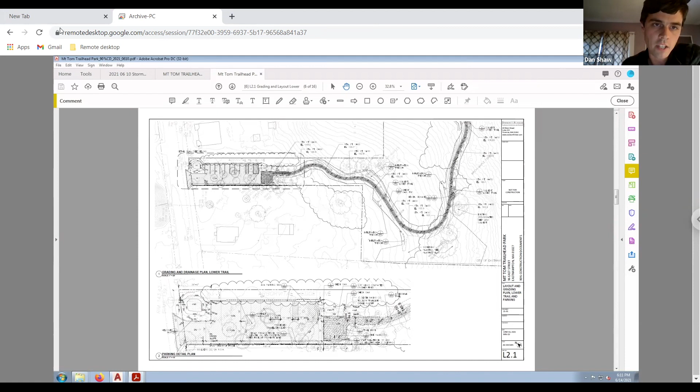Despite the spatial constraints of this part of the site, that's really the only reasonable place to locate any parking for this project. And in that area, we were able to fit a rain garden sized to handle the parking lot's water quality volume and recharge volume, with overflow handled by an existing 10-inch culvert that's currently on the site, right here, that ties into the city's separated storm sewer system on East Street.

We had a test pit dug last week to confirm the underlying soil suitability and found sand and no evidence of groundwater at full depth.

The rest of the project area uphill of the parking area is, again, a trail with low impact development drainage techniques—check dams, infiltration trenches, swales—that are designed to spread stormwater that crosses the trail out across the existing meadows and forests, to maintain existing drainage patterns currently on the site and not to convey new concentrations of flow downhill.

So that's a quick overview of the project. Unless Steve D'Ambrosio, our civil engineer, has anything to add, we could take any questions.

Hi, Steve D'Ambrosio, GZA. Dan, I think you did a great job with the description. I really have nothing more to add, other than that I'd be happy to answer any questions that the commission has on the design.

I just want to note that there are no jurisdictional areas for the Wetlands Protection Act on this property. The commission is reviewing it because it does not need to go before the planning board. So under the stormwater ordinance, it came to us—it seemed most applicable to come to us. So it's really just the stormwater permit being reviewed today.

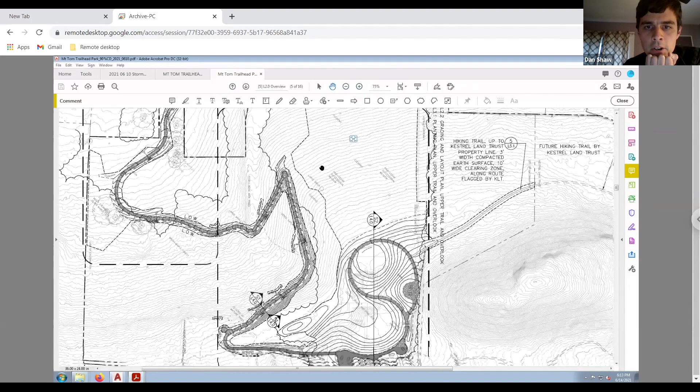Yeah, sure. So the site as a whole—currently the existing condition is meadow in this area, forest in this area, and another meadow down here. And the demolished house that's here, which is kind of a rough paved area—there's a driveway that extends up here, and an old crumbling asphalt place that used to be the parking area.

So we're removing all of that and regrading the top of the site into a meadow where the trail culminates. Then the rest of the site, what we're adding is the trail traversing the grade, and we're using swales on the uphill side of the trail throughout to keep the trail from washing out.

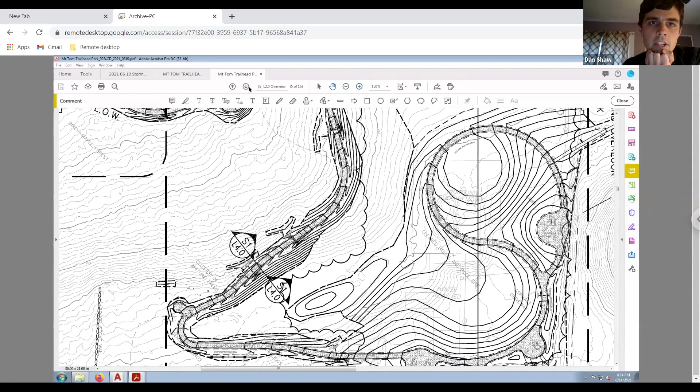And then, because those swales are intercepting stormwater flows, periodically along the way we have—let me go to a detailed plan that shows it better—we have check dams and culverts that cross underneath the trail. I'll show you a typical example of that for the upper trail.

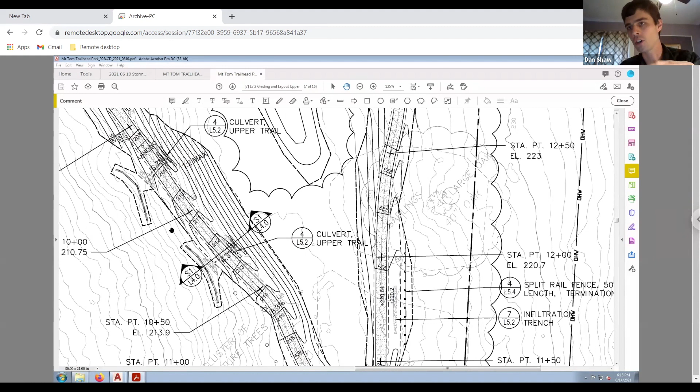Where the trail crosses through, we have a swale on the uphill side, and then a sump, a stone-lined, dry-laid stone sump with a PVC culvert crossing under the trail, exiting at a stone-lined outfall that will be shaped on contour to act as a level spreader. Downhill of those, in the steeper forested part of the site, we're installing biodegradable compost socks that'll be seeded upon completion of construction and remain as permanent berms to level spread the water further and drain it back out across the woods, which is what it currently does today.

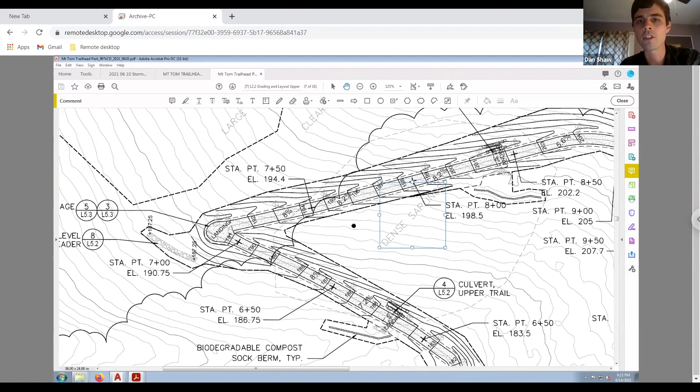That happens at several places throughout the trail. There's one place with a long stretch of trail where at the end of the swale, there's a stone level spreader, again just to distribute the water back out towards the places of the site where it currently drains. Then the lower portion of the trail system, which is a meadow, is on the page up here, I'm going to go to.

Conditions are a little different - it's flatter and it's an open grassy area. For the meadow portion of the trail, where the uphill swale by the trail crosses under, at the outfall of the culvert, we're installing geotextile-wrapped drain rock filled infiltration trenches that act on the same principle, spreading out water from those culverts and giving an opportunity to leak on contour out into the meadow. We have those features in 3 places along the trail here, just to counteract the trail and its swales' effect of intercepting water.

For stormwater in the lowest part of the trail that approaches the parking area, there's stone check dams using modified rock fill and 1.5-inch drain rock mixed together, just to rough up the surface of the swale, slow the water down, and give it a chance to infiltrate. Soils throughout the site are sandy, so we think this is going to work well. There's a couple low points we're placing along the trailhead just to give water one final chance to settle down, stay in place, and infiltrate before any of it crosses the parking lot into the rain garden.

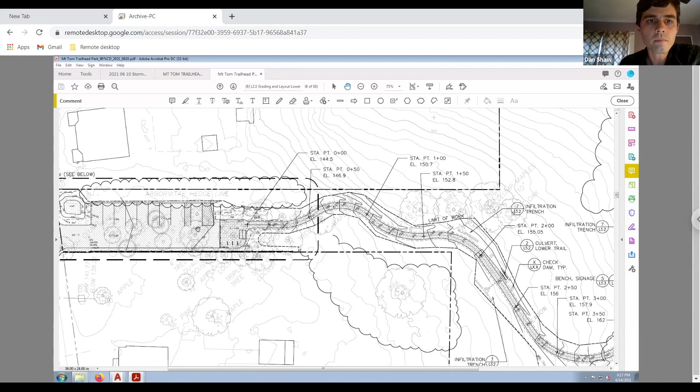I guess while we're talking about the upper trail, what kind of construction period erosion sediment control measures will be implemented?

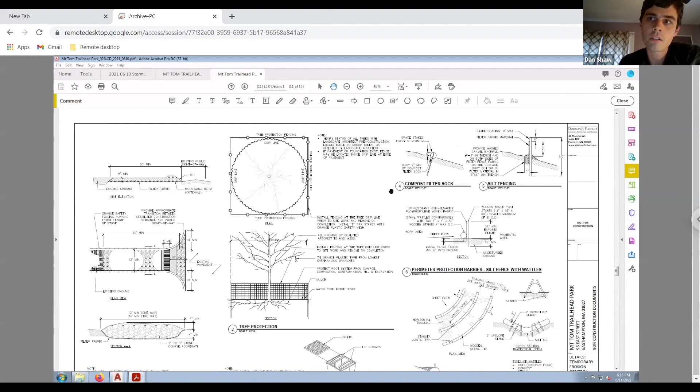During construction, here I can go to the details page. We're planning on perimeter sediment controls, using compost socks, straw wattles, silt fences along the perimeter. We're emphasizing in the SWPPP and in our specs use of biodegradable compost socks, specifically not using plastic mesh socks or wattles. And then, using typical details for the larger graded areas where there will be exposed soil, parameters for spacing of straw wattles on contour. It'll be up to the contractor to deploy these sediment control measures as needed, as weather conditions and project conditions require.

And then in those, it looks like some fairly large cut slopes in some areas. What will be done for stabilization of those, seeding, and that kind of thing?

All of the cut slopes, anything that we're affecting, is going to be seeded with various meadow and slope stabilization seed mixes. Our basis of design product is New England Wetland Plants seed mixes that we've used on a lot of other projects. In the open sunny areas, we're using the native wildflower seed mix, and in the woods, the cut slopes will use the semi-shade mix - a mix of native grasses and forbs designed to establish quickly to stabilize the slope. In the meantime, the sediment control measures I shared a moment ago will apply.

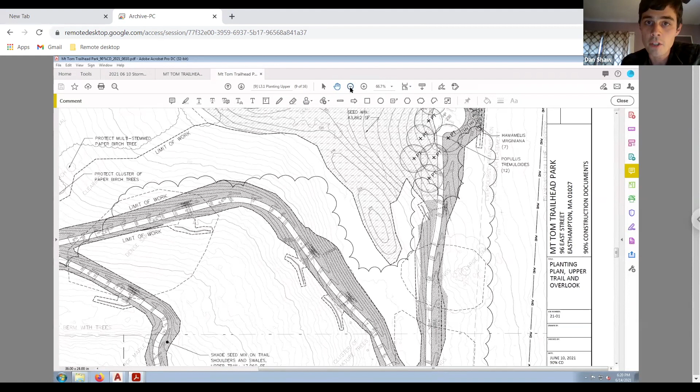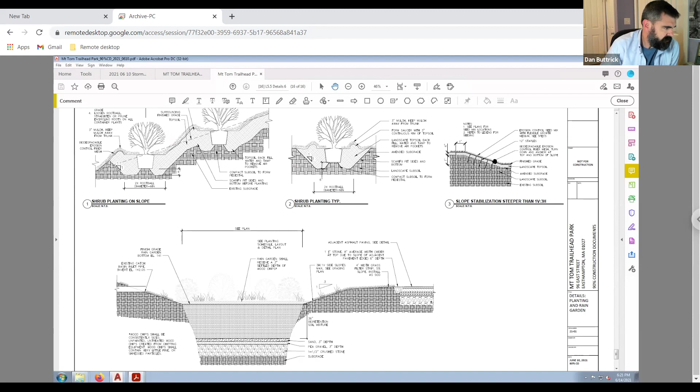And then in terms of stormwater calculations and whatever goes into that municipal separate storm sewer system, how do peak and current flows compare at that design point there?

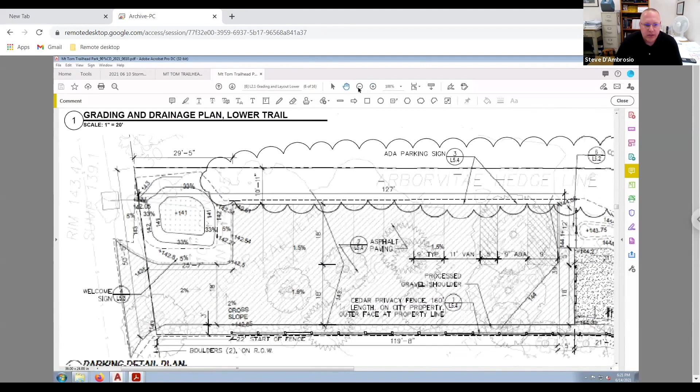I'll jump in at this point. We're able to meet the 2-year storm, so there's not a ton of flow heading to that corner of the property. In the 100-year storm, we're looking at 1.7 CFS in the existing condition and 2.6 in the proposed. In the 2-year storm, it's like 0.1 CFS, and we're able to match that. But as we get into the more intense but less frequent storms, there are small increases in the peak flow.

But it's not clear in the town's regulations what design storm we're required to design to.

We felt in this instance, designing the rain garden to treat the stormwater quality, which is a half inch over the parking lot, and also to provide the recharge. The soil on site, the surface hydrologic soil group that we used was group B, and we meet that volume as well. So we're able to recharge the water, treat for the water quality storm, and we meet up to the 2-year storm for peak flows.

For the benefit of everyone listening, the project, being not a Wetlands Protection Act jurisdictional project, and also not a larger disturbance type stormwater project, has a drastically reduced set of stormwater standards and requirements. It's really below what EPA required the city to meet on the ordinance we developed.

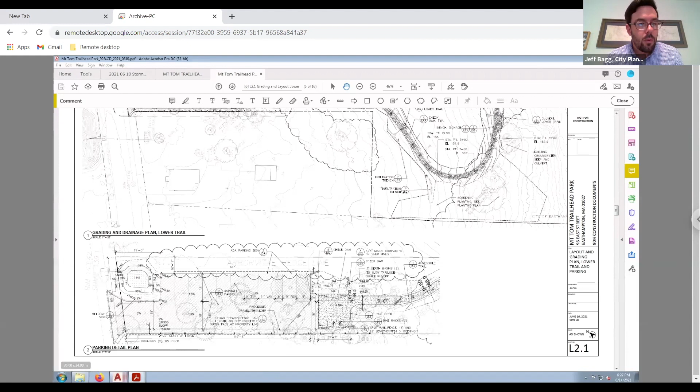So the PARC grant, if our contractor walks away, we will have some pretty significant issues just dealing with the park department, the PARC program. In a worst case scenario, we would utilize the CPA funds, which are matching, to bring the project to a point where it could at least be stalled until we can come up with another plan. I don't know if that answers your question, Dan. It's something where we do have the ability to hold 50% of the value of the project. And I think we'll know pretty early how our contractor is and the way it should function once we get in there and start the project. So we think that's suitable.

Okay, and actually I probably should have asked before, what kind of construction oversight will there be for the project? I'll ask for a little help from Dan on this, but generally the structure is, once the stormwater permit is issued, we're going to utilize Cassie's help as conservation agent, myself, and Diane Rossini, who's the staff engineer. We haven't ironed out all the details, but what we'd expect is myself to be the receiver of all information and change orders, and Diane would be available to inspect the site at least once a week and review any large change orders significant for the project. We've had this model for other projects and it seems to work reasonably well.

The dredging project at Nashawannuck Pond is a good example of us doing this for smaller projects. This isn't an extremely large construction project, so we feel like the 3 city staff members, with Dodson and Flinker available for other issues that may arise in terms of project design, is generally our plan of approach for construction oversight. And then the contractor, Dan, and this is where you should jump in, but with the SWPPP, the contractor will be managing and monitoring that. Is that correct? Yeah, yes, that's the contractor's responsibility.

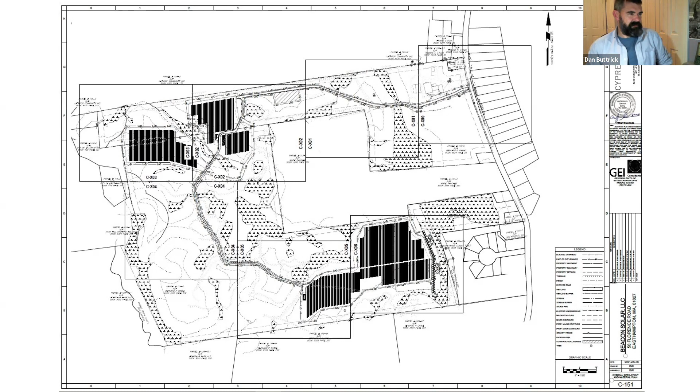So Dan, it sounds like you want to see the original one from 2019, not the amended one, since there's been three versions now. I'd just like to visually compare this to the most recent one we approved, the current approved plan. Okay, hold on a second.

While you're working on that, Cassie—is the installation or support method for these solar tracking panels different, and what does that installation look like? As I understand it, it's very similar, except these are single poles that the individual panels rotate on, rotating east to west back and forth. That's opposed to the racking system, which would not have been single pole—it would have been a series of poles with a fixed rack constructed on top.

So to be honest with you, I'm not sure whether there's fewer poles in the ground, which are really more like I-beams anyway, not poles like a telephone pole. There's probably fewer poles, but it's probably a bigger pole installation in the center, with a bigger foundation to it. Yeah, I don't believe there's really a foundation. I think they're driven in. Just driven in, okay.

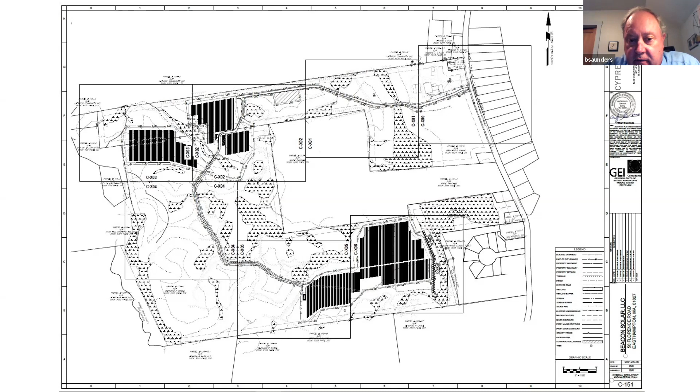It's Mike. Was there an elevation map showing elevation or slope? There is a topographic map. We have topographic information, it's just not at this size for the whole site. The topography is more limited in terms of contours.

Yeah, can you pull up the contour map? Yeah, hold on. I'm just wondering about the impact, if this is the highest point of the property, and the flow of water. Let's see if I can bring up something here. My screen sharing stopped.

I mean, that northwest array, is that the highest point? Is this showing? Not yet, no, for some reason I'm not. Here it is, there we go. That's the one I wanted. Bear with me, I'll bring it up. There it goes, we'll start now.

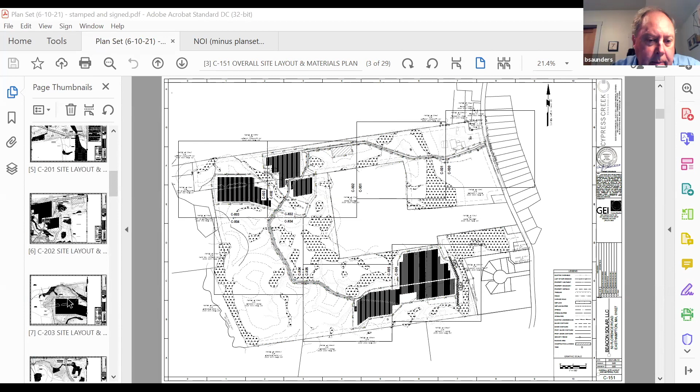All right, so where exactly is the question about the topography? That northwest corner? Okay, I'll get you right up there. Let me see if I can make it bigger for you. Is that too big? Yeah, no, that's good.

It's at least a 30-foot drop off, right, going down. From where? This is a valley in here. So it's down, so you're up at... no, I'm sorry, you're right. It's going from 185 to 180 to 170, 165. So yeah, that's up there. It's 25 feet from your 185 contour.

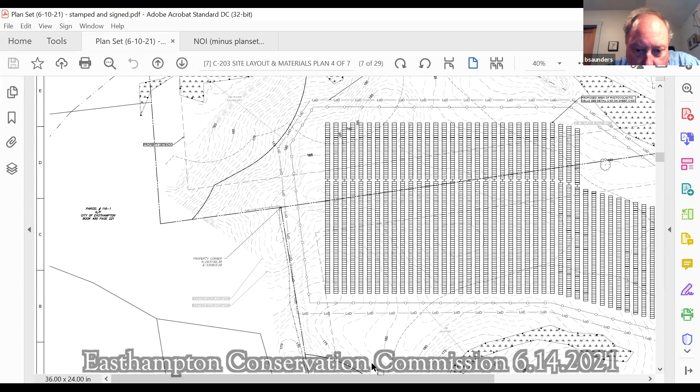Over here, let's see, 175 is up here. That goes down to 170 at this point. This is a ridge right through here. So that 185 contour is coming around like this. On this side, you're on the other side of that ridge.

So where specifically are you asking? Yeah, I was just wondering the impacts as it goes downstream to the wetlands. Right, so at the closest point up here, you're 25 feet above. It's more like closer to 28 feet to the edge of this wetland down here.

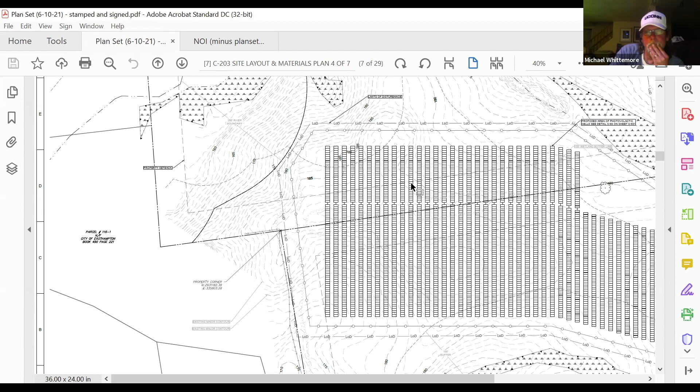Unfortunately, I don't know what the scale is at on this image, but it's 200 feet from — you see this line with the two dots? That's the brook, so this line is 200 feet away from that. Right. Do you have proposed erosion controls along the limit of work there? Yes, yeah.

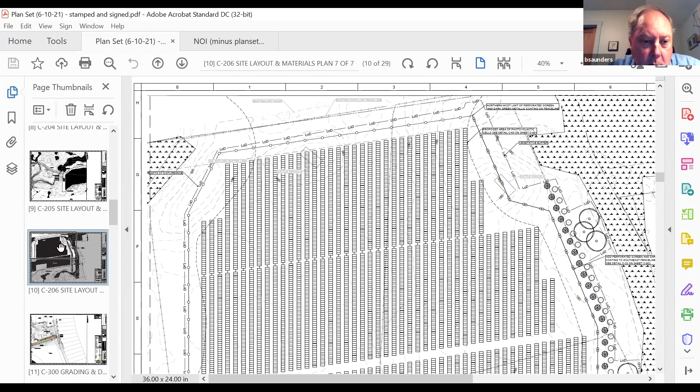If you want, I could show you the erosion control map. Cassie, were there basins or anything? Catch basins or anything? No, there are no catch basins proposed. Again, we don't have any real impervious surface. You see the SF line there? That's the silt fence. Okay, erosion control.

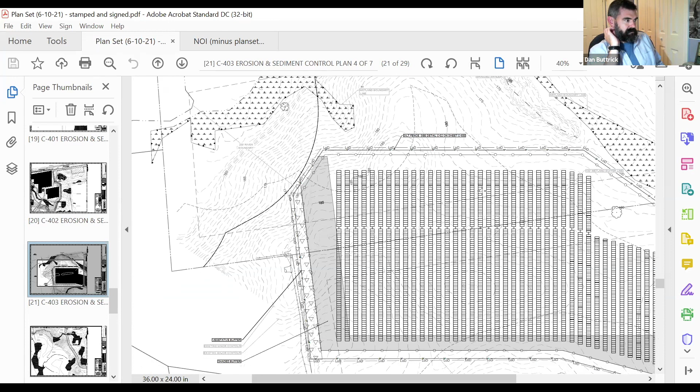Okay, thank you. So each solar panel just sort of drips directly on the ground right next to it, rather than having a big, contiguous runoff of impervious cover. So all the rainfall infiltrates right around where it would have fallen anyway. At least that's how I interpret that. Is that correct? Yes.

Do you plan during construction that there'll be more than 5 acres of exposed soil at any point simultaneously? There could be.

So the reason I asked is I was doing some research, and that was a concern for other potentially even larger projects, that if there's over 5 acres simultaneously disturbed, that could be a concern. If there was a major rain event, it could be a significant amount.

Yes, that all depends on the site and what the disturbance is. If you're on a very steep slope leading down to a wetland, you'd need to be particularly careful. On this particular site, the grading is a couple feet in depth, knocking that knoll down into the adjacent valley to flatten it or make it more consistent. We're not talking about wholesale grading of the site like you'd see in commercial development projects or subdivisions.

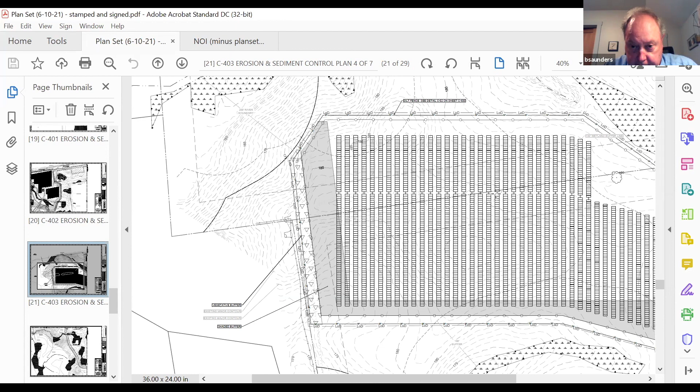It's really more of a spot grading situation. If you look at the grading plans, it just shows what I'm talking about, like knocking this down into there. We don't have large exposed areas anywhere that would concentrate flow going somewhere.

So you don't have any catch basins or anything like that during construction to help? No, we really didn't see a need to do that. That would just be doing more grading than necessary and exposing more.

And do you think, I don't know if this is something the commission would be interested in doing, but potentially a condition asking that there be less than 5 acres of simultaneously exposed soil? I don't know if that's reasonable or too burdensome for the project. It's just something I saw in my research noting that those huge areas of exposed soil can be a concern, but they're looking to construct this whole thing in a 3-month period.

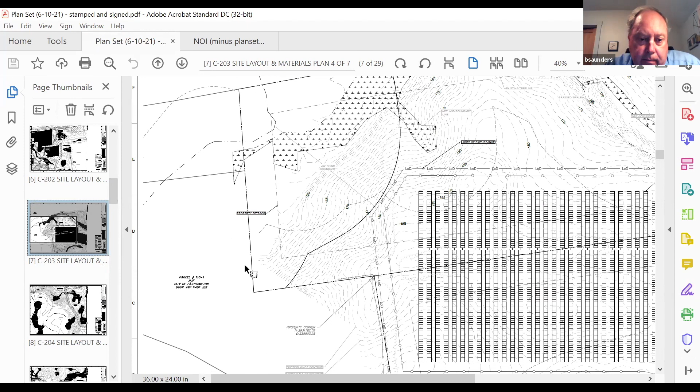Let's go back to this. So Bassett Brook is way over here. So you're showing what's on the property? Well, to the extent of showing what's on the property from a resource area standpoint. For instance, in this case, the 200-foot riverfront area is the resource area. We do have Bassett Brook identified where it's reasonably nearby, and we're outside 200 feet from it.

Well, yeah, we had to stay within the parameters of our site. In this case, Bassett Brook is right here, you see my arrow? And then it goes into this wetland.

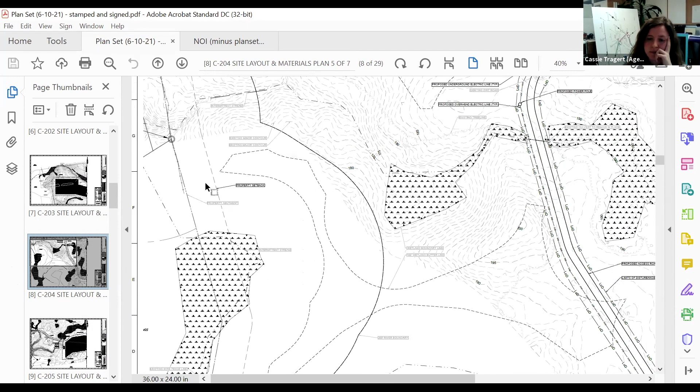I had another question. Would it be feasible for the plant, I guess my question is, what is the plant mix or seed mix you're proposing for the reseeding? And then would it be possible to do some kind of pollinator mix? I know UMass Extension has information on pollinator species potentially being put in that area.

Right, we had a mix that was specified in 2019, which we would go with. But if the commission would now like to have a pollinator mix, I believe that may have actually been in the order of conditions from 2019. If it's not, we wouldn't have an objection to putting it in this one.

I have a question about the drip line on the solar panels. I know these ones will track, as you said, so it doesn't necessarily concentrate the drip line in one spot throughout the day, which disperses that a little bit. Have you done a project like this before and seen any kind of impact in terms of erosion at the base of where that drip line is when you have this many solar panels?

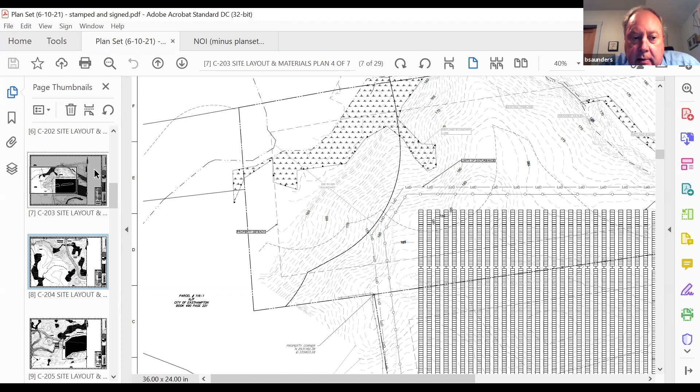Yeah, I can't speak to that specifically myself, but I do know from DEP's guidance 17-1 that they have found it doesn't cause a problem if the panels are designed in accordance with the standards in there. And these panels have been designed to those standards.

That'll also be part of the maintenance they do in terms of mowing. They'll also be maintaining the ground cover. Would checking for substantial erosion be part of that? Exactly. That would not be good for them either.

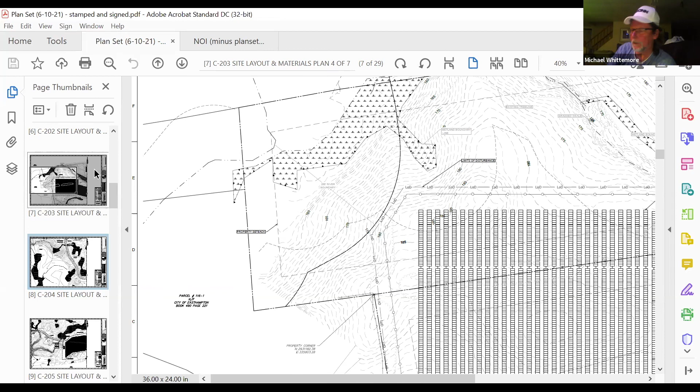Hey Cassie, it's Mike. Did Mark Simpson have any comments on our latest design? He did, and I can share those here in a second. Okay, I'm just going to share my screen quick. Let's see.

So the first comment talks about resource areas, the following comment is included. Based on aerial photos, it appears that a wetland stream crossing was expanded, possibly beyond that allowed as normal maintenance or normal improvement of land in agricultural use. This is something that had happened in the past. It does appear the resource areas were altered to increase land in production and/or to place an additional access road in the area. The commission should review previous filings as well as notes taken during site visits.

The comment is related to what the plan shows at location 2A and 2B. The commission might also review the definition of agriculture, 310 CMR 10.04 agriculture. However, the resource area boundaries are locked in for the life of the ORAD.

Because an order of resource area delineation was completed in 2019, I believe, those resource areas are locked in place. So there may have been a violation that occurred in the past. I don't know, but there's not really much action the commission can take on that generally, because they've now locked in on whatever the existing boundary was in 2019. So if there was a previous violation, I think he just wanted to make note of that, is my interpretation.

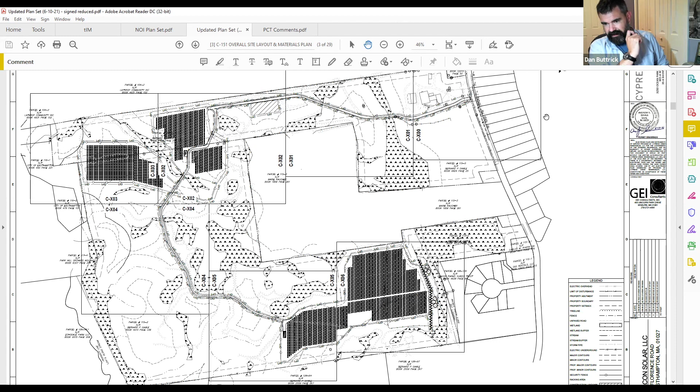And then it was the pollinator mix that we talked about putting in the conditions. I don't know if anyone has anything else that we talked about or were thinking of. Just the continued monitoring to make sure that erosion isn't an issue along the drip lines. Okay, I mean, do we want to look at the conditions in the existing notice of intent? We'll just sort of go through them real quick and see if anything jumps out at us. Yeah, that was what I thought might be a good idea. Okay, let me pull it up real quick.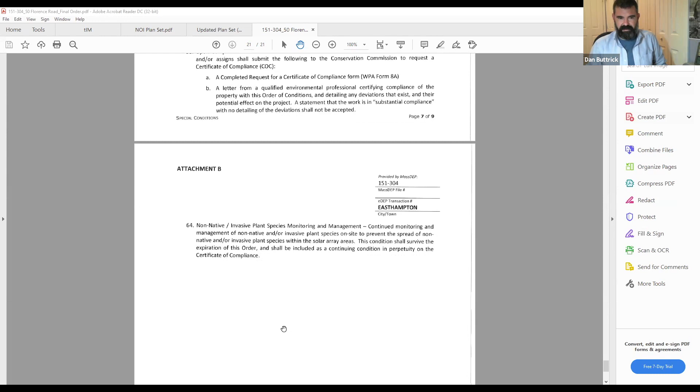Do you want to keep that one? Can we flag that? Can we see if there's another condition that says the invasive species shall be managed? Let's see. No, okay, that was just — so let's see, would that be talking about during construction or in perpetuity? Well, whatever. What'd you say, sorry? Whichever. Okay, so basically, what do we say are the follow-up actions to do? So at least here, post-construction, it had — I'm assuming this meant in perpetuity, but it's not explicitly stated here. Continued monitoring, oh, here we go.

Continued monitoring and management of non-natives and invasive species on site to prevent spread of non-native and invasive species within the solar array areas. This condition survives the expiration of the order, a continuing condition in perpetuity on the certificate of compliance. So they would need to submit a plan for review and approval, and then that management plan would exist and essentially would probably become part of the operations and maintenance.

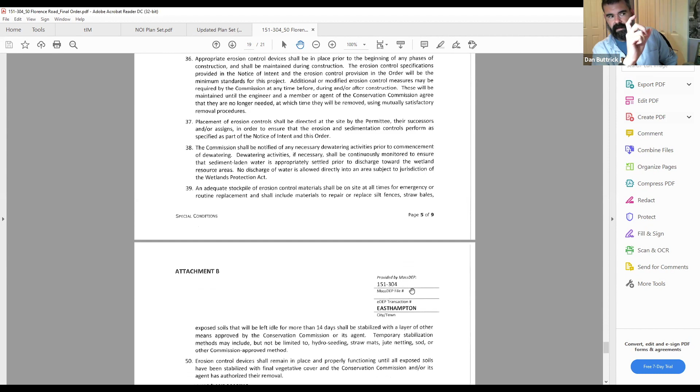Yeah, I think maybe we should add a condition that says that at the time of granting an order of conditions, invasive species shall have been removed within the work areas or whatever. So are you saying you like that wording of the in-perpetuity part? Well, I think we should. So right now we basically say develop a plan to remove and control invasive species, and then follow the plan in perpetuity. But I guess I'm thinking we add a step, meaning that when we issue an order of conditions, there not be invasive species within the work area, so that it's not — well, before we issue a certificate of compliance, make sure that there's not any, that the plan is working, essentially? Yeah, okay.

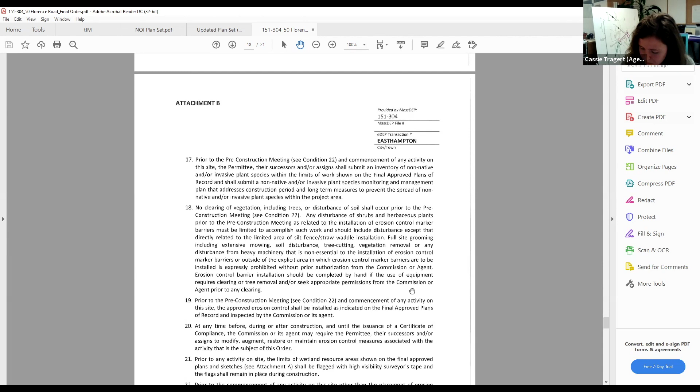Installing the erosion controls pre-construction. Let's see. We can modify. Flag the wetlands. Pre-construction meeting. Notify me before you get started.

This I've changed to 5 business days since our boilerplate has been updated since then, and that's a little bit easier for me.

Are you missing pages? This scan, I think, is missing pages. No, hold on, let's see if I can find a different scan.

Is the property owner the same as it was in 2019? The property ownership is the same. Okay.

Well, so this work will -- I think there's one area where the property owner has been planting the site, but I think that's an area where an array is proposed. Is that correct, or is it not correct? I guess I'm wondering if the property owner will have other activities on the site.

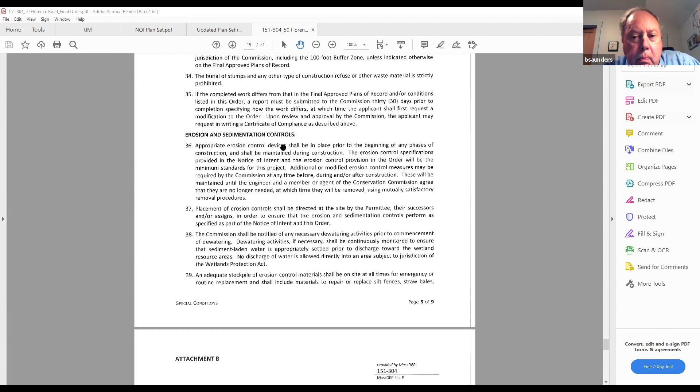I guess I'm not clear on if the property owner decides -- I'm not familiar enough with the site to know if there are areas that are currently open that will be left without solar arrays on them. But I guess I'm wondering if the property owner decided to undertake other agricultural activities in those areas, if they could, based on the current status of the site.

If they were going to change, have new agricultural areas on the site that aren't existing agricultural areas, they'd have to come for an order. Yeah.

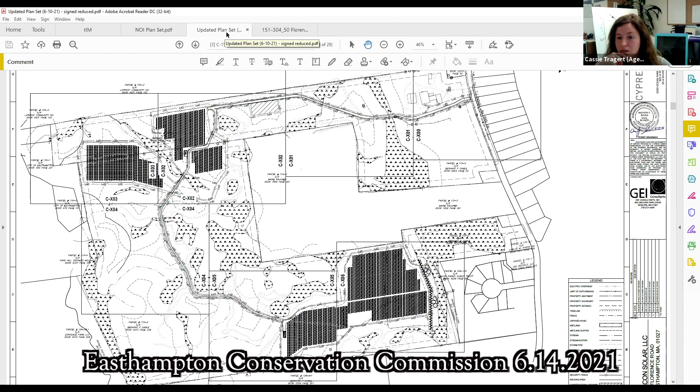Even if there were areas that are now hayed and they wanted to plant them, they would need to come? That, I don't think so. I think as long as it's being used for some kind of agricultural use, or has been within the last 5 years, then they can continue to use it for agriculture as long as it's within that 5-year window of the last agricultural use. And I don't think it matters what type of agricultural use it is.

What other conditions are there in there? So this scan doesn't have all of them, so I'm going to grab the physical document here in a second. We'll just go through these ones now. Trying to think of big pre-construction requirements.

This isn't on here, but in the past, part of our boilerplate has been weekly monitoring of the site during the period of disturbance, when there's ground disturbance. Then you can come to the commission for a request to suspend reporting if you feel like the site is sufficiently stable, and stop the reporting once the commission gives you the approval to do that. Does that sound like the commission's still good with that monitoring schedule? Is that appropriate in this instance?

I'm okay with it. I think so. I'd be surprised if we didn't have that in here before, but -- You probably did, like I said, this is an incomplete scan. Right, maybe on a different page, because that would make sense. Okay, just with the time frame.

Another thing is establishing markers of the wetlands or the buffer zones or things like that. I don't know if that's appropriate in this instance, if that was part of the original conditions. I can pull the file right now.

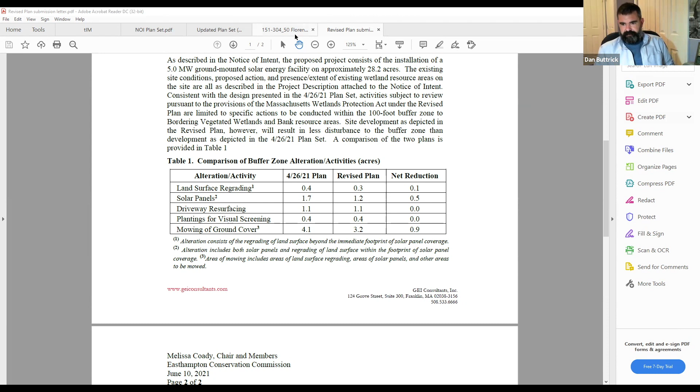This set within the plan set is grading and drainage plans — those have the specifics of the grading. There were those red and green sheets we were looking at earlier. Well, the color of the cutting and the filling is indicated in color on the sheets.

All right, just share the screen again. Yeah, that might be helpful. I can't get to it very quickly, I'm jumping around.

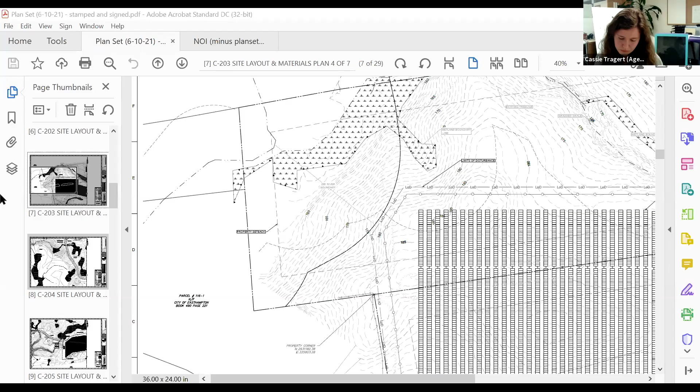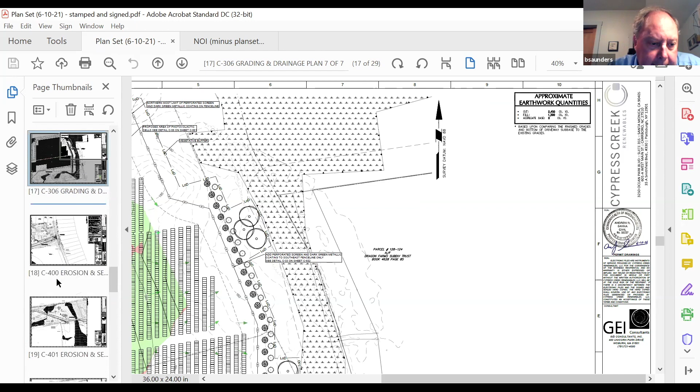See the greens and the reds? Those indicate the areas of grading activity. For instance, we go down here — this is on the order of a couple of feet because it's in the middle of the cornfield. And then on each sheet we have, up in here, the quantities. See that little table? Those quantities are on each sheet, and specific to that sheet, so the quantity on this sheet is different than the last one. Okay, thank you.

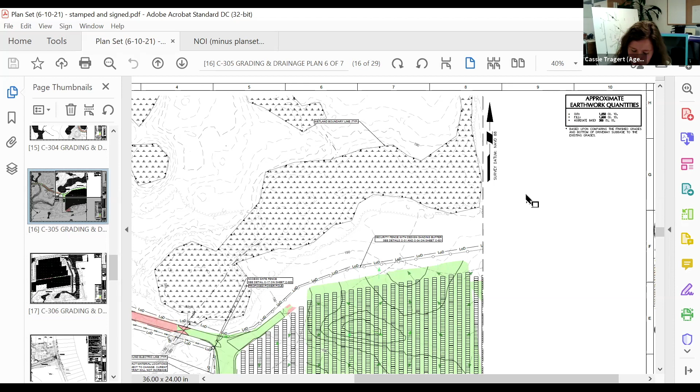So in terms of conditions, the only other one I was curious about was setting up permanent monuments at no greater than 25-foot intervals, clearly visible, to demarcate the 25-foot no-disturbance setback from the wetlands, and at each of the 6 culverted crossings clearly labeled as such, to the satisfaction of the commission. Do we still want to have that? Is that changing in any way? Does it still sound reasonable? If we had it before, we should do it again. Yeah, we don't have any objection to that.

Okay, so it sounds like we keep the original order of conditions, and then we're adding in no more than 5 acres simultaneously disturbed soil. Can I speak to that first, please? That may be very problematic on a whole site-wide basis. I'm wondering if we can limit that to work within the 100-foot buffer zone — no more than 5 acres within the 100-foot buffer zone, or contiguous acres within that zone, because it's out here in the southern array.

Holding that to 5 acres at a time is going to completely mess up any ability to construct that thing in a timely manner. And that again is an open cornfield.

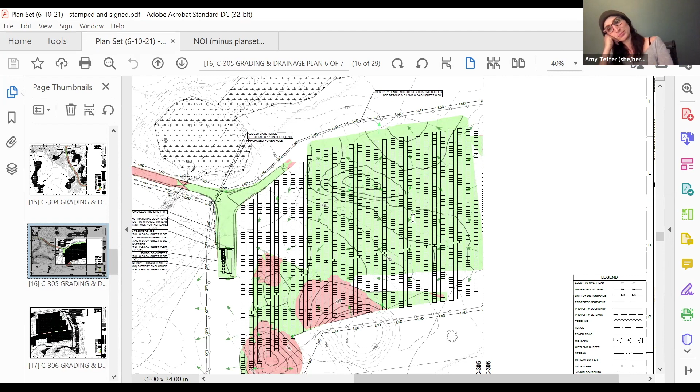Okay, I'll get in touch with you, Brad, as soon as I can with the updated order and get it submitted as soon as I can. All right, Brad, thank you. I think I'm still on tonight. Oh, you are? Okay. Oh, yeah.

We have the certificate of compliance. Yes, we got to close the other one. Okay.

All right. Public meeting or public hearing, item C, notice of intent filed by Lathrop Community, who had a long wait tonight. Should I go ahead? Go ahead, please.

Okay, hi, my name is Lucy Baruch, and I'm a resident at Lathrop and co-convener of the Trails Working Group of the Residents Land Conservation Committee. Lathrop's Executive Director, Tom Wright, is unable to attend this evening, but our CFO, Holly Smith-Beauvais, is here, as is Jeff Squire from Berkshire Design Group. Also here are fellow residents Doris Atkinson and Barbara Walbert, who I may turn to for help in answering questions you may have. There have been trails at Lathrop for a long time.

We submitted this NOI to improve the existing trails because of our interest in caring for the land. Our goal is to reduce the potential for erosion and to make our trails safer and more accessible to walkers. While we have an interest in each of the improvements specified in our NOI, we are not wedded to any of this, and we will be looking closely at design changes to address some of DEP's concerns. Because Lathrop's meadows have been farmed, brush hogged, and mowed for decades, we did not specifically request permission to continue that practice. I also want to mention that in our NOI and when speaking, we use brush hogging and mowing without differentiating. We're eager to hear from the commission about how you would advise us to proceed.

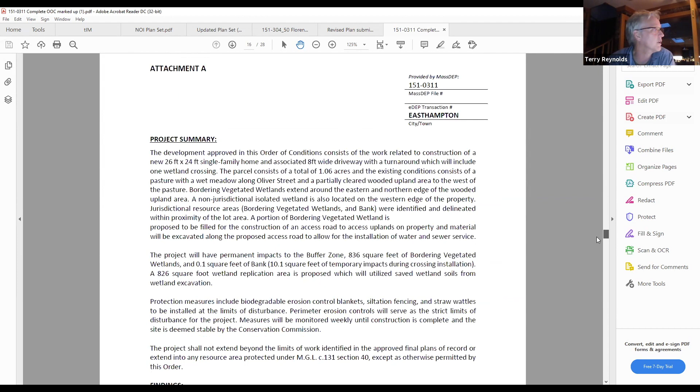But I can go through them. Just a few things, a couple items. The first was in paragraph 1 of Attachment A, the isolated wetland is actually located on the southern edge of the property, not the western edge. So we'd like to correct that and make it clear where that is.

In paragraph 2, there's a typo in the buffer zone. It should be an 826 square foot replication area, or impact area, and then 836 replication. Just a minor detail, but we are replicating more than we're disturbing.

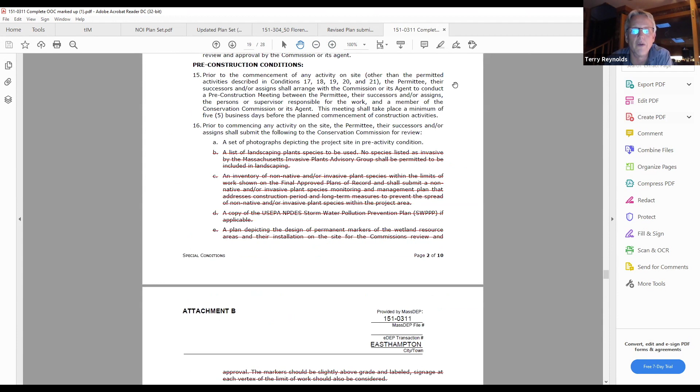And then the following in Attachment B were items that you feel should be struck out. These are landscaping. We had talked about trying to keep the reporting to a reasonable amount for a single family home that is more manageable. This is not a large impact, it's not subject to an NPDES permit. So we'd like to strike through the list of landscaping plants to be used. There aren't any being proposed on this site other than the replication area, and those are listed.

Inventories of non-native and invasives -- I'm sure there are some, but that wasn't something we had really discussed in terms of tracking. SWPPP is not applicable to this project. We had not talked about permanent markers for the wetland resource area, so I'd like to see that taken out. And then the construction sequencing plan for phase 1, including stormwater management system -- that stuff's not applicable to this.

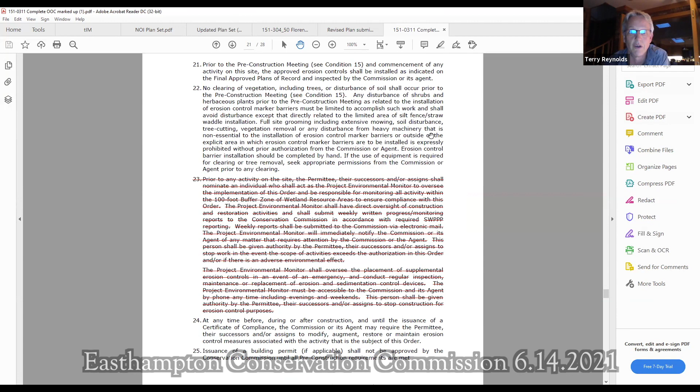Straw wattle detail -- these are kind of boilerplate stuff that I think aren't appropriate. So that was through H. And then number 23, this again comes back to SWPPP and somebody doing ongoing inspections. So this really isn't applicable for this scale project. This is more intended for a commercial project, so we'd like to remove that.

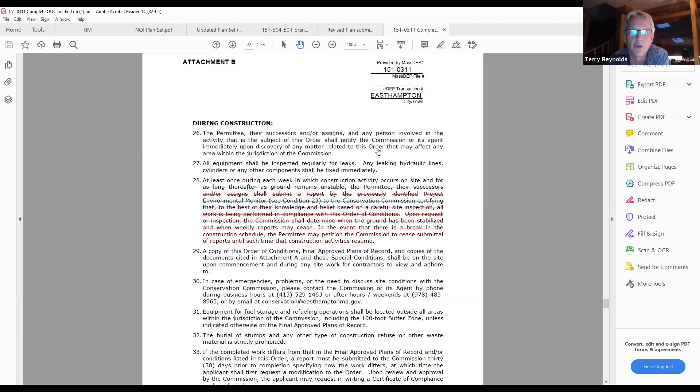And then the next one is 28. Again, this is more reporting and stuff on inspections and so on. So what we had agreed upon in the meeting was that the applicant would invite Cassie, the agent, or the commission to come inspect at specific intervals -- when the road comes in, when the replication's being done, the stream crossing -- at those points. So this is a little bit more than was really intended.

And then 37, sentence 3 -- no discharge of water allowed into subject areas. This entire project is a buffer zone project, so it's kind of impossible not to have some discharge into a jurisdictional area.

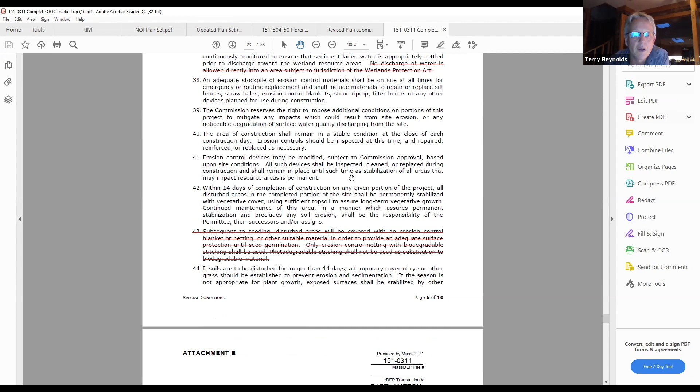And then 43 -- subsequent to seeding, disturbed areas, erosion control netting. Yeah, it just doesn't apply to this project. We're not putting down netting.

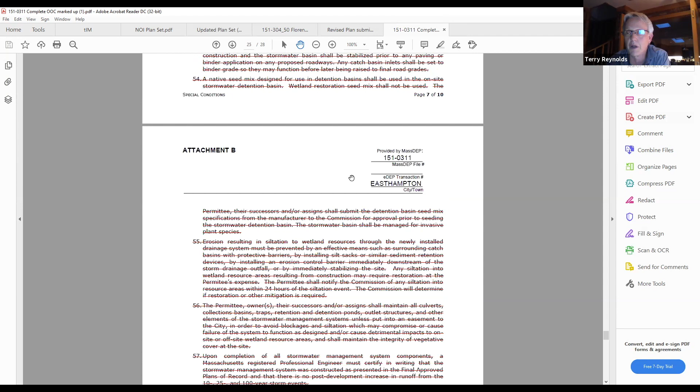And then 53 through 57, again, is stormwater management, which doesn't apply to this project. 63, fertilizers and pesticides -- that is addressed in a previous comment in terms of there shall be only approved fertilizers used. So if we can remove that.

And then the last, I believe, is the as-built plan by a registered engineer or land surveyor. Again, this is just a residential project. So that's basically it, and hoping you guys can agree to that. It was becoming problematic in terms of him recording it, and being a conflict and an impact to the property that a lot of this you can't comply with.

I see. So some of the ones that are either redundant or don't apply, you want those removed because it was cost prohibitive -- just the physical length of it was cost prohibitive to get it recorded.

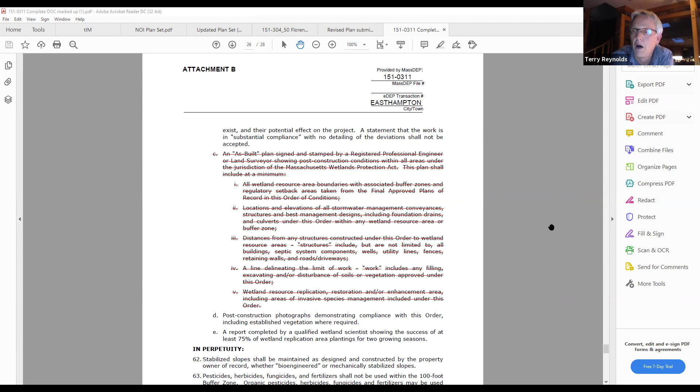And some of the other ones -- well, yeah, in the meeting we had talked about not being overly burdensome on them in terms of reporting. The reporting really is intended for larger scale projects that have ongoing potential impacts. This is not one of those.

So, and then doing work in jurisdictional areas and buffer zones -- this is a buffer zone project. All the work is in the buffer zone.

So if it's agreeable, we'd like to just have it on record to strike those items. And then we can record the minutes along with the conditions, and that should address the issues.

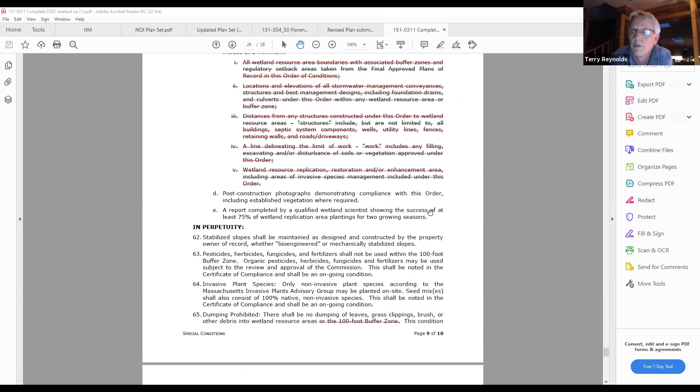I must have not been here for the meeting, or this project did not ring a bell for me at all. I've been looking for...

That is possible, Dan. It's a single family home that is near the Chicoine farm, and there's a crossing involved, thus a replication area, and then the house itself is all within the buffer zone. So the only bordering vegetated wetland impacts were in the crossing, correct, Terry? And then the house itself is all in buffer zone, right?

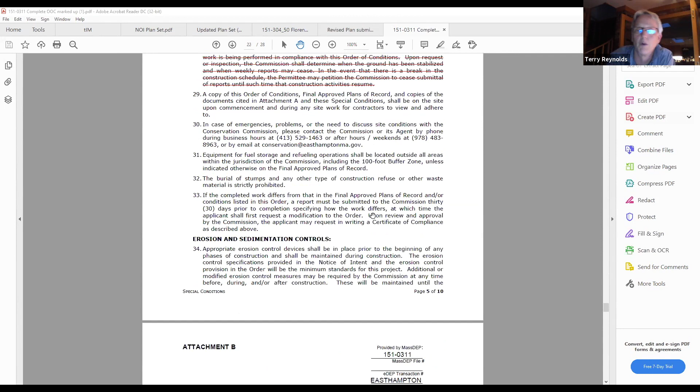We had impacts, as it said. The crossing itself was a stream crossing, so there were impacts coming up to that crossing area. I can show you the plan if you want, I can put that up if you're interested.

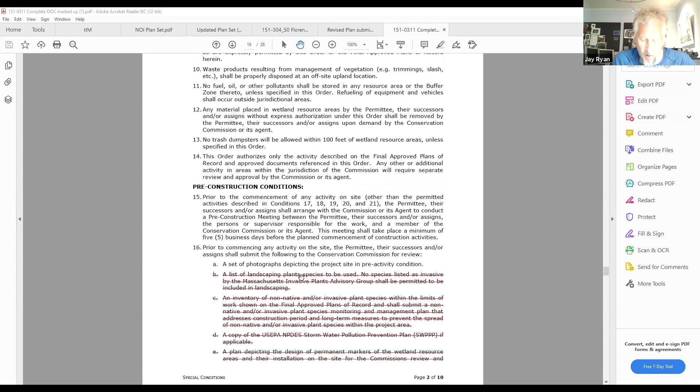I was just trying to describe it briefly to see if it jogged Dan's memory, but it's really possible you weren't there, Dan. I know there were a few meetings you weren't able to attend back then. Was this early December or November? It expires January 5th of 24, so it was probably when we looked at it, or December. Yeah, it was December.

Was there also a replication area? Yes. And you're saying you're doing more replication than what is required? Yeah, it needs to be 1-to-1, and the way it got recorded, it was showing slightly less. The numbers just got reversed.

For what it's worth, I agree with Terry's assessment, particularly about both those typos from attachment A. And the ones that are stormwater related - stormwater does not apply to the single family home, so they're kind of left in there again because it's the boilerplate. In the past with other projects, it's always just been noted as not applicable, but I can understand Terry's explanation of why they want that said explicitly in the minutes. Just at least speaking to those two items for sure.

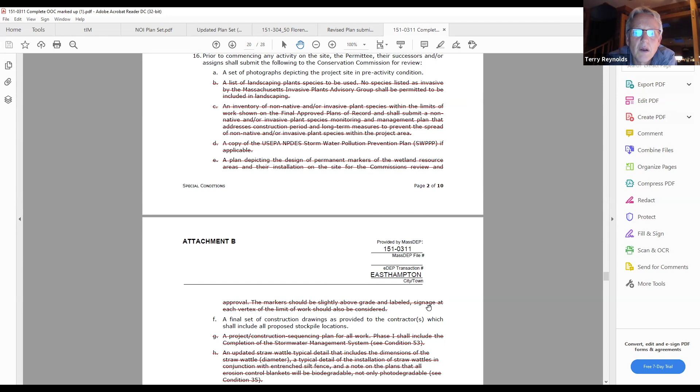Would that be - so this says permanent markers of the resource area. Would there be another condition that talks about the limits of work as well?

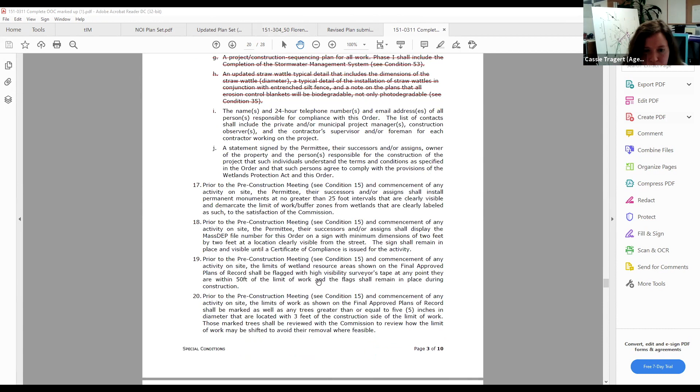Yeah, I'm sure that there is - let's see, down here, prior to construction. Just split, no, not that. Limits, so the wetland flagging, okay. Wetland flagging - so prior to the pre-construction meeting and any site activity, the limits of work as shown in the final approved plan of record shall be marked, as well as any trees greater than a certain diameter that want to be removed, for the commission's review.

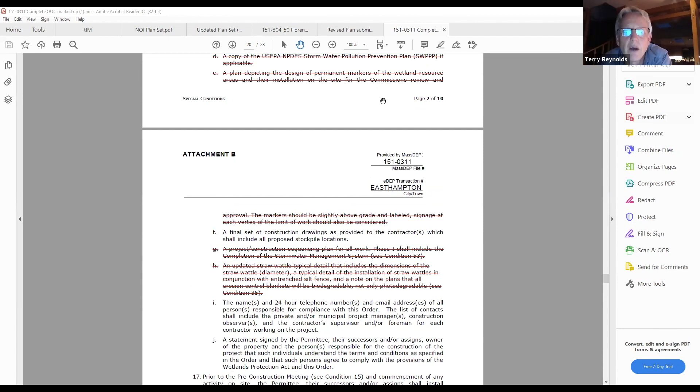And then the limit of work could potentially be shifted to avoid that removal. Okay, administratively, I don't know how this works, but I guess it would make sense to get rid of duplicative conditions, and if we're satisfied that marking the limit of work is good, then we could not also have a condition to mark wetland boundaries. Yeah, I'm not - the E may be a mistake because I'm not asking that he not put permanent markers for his limit of work. I'm not sure if it was listed somewhere else in the conditions, and that's why this one was struck through.

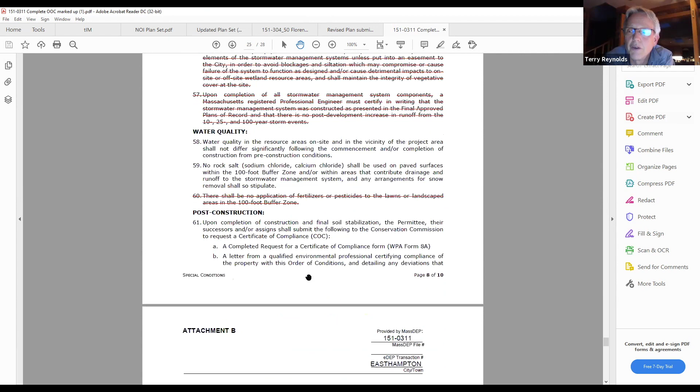Not typically, as far as I know. Usually, I think, I'm going to double check to see if it's not. I know I spent a whole bunch of time explaining to him why that permanent marker was required. So that isn't something that I'm asking be removed from the condition or be acknowledged as being removed.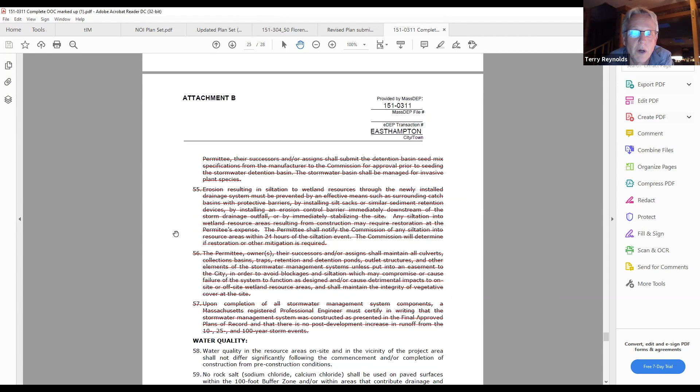Because this property, as you know, you do want the permanent markers. He likely is going to be there till the end of his time, but for future owners you do want that. So this is starting to sound familiar. I may just be getting too old.

I can show you the plan if you want me to share it. Yeah, sure. We don't have anything else to do tonight, do we? We're waiting this long. Yeah.

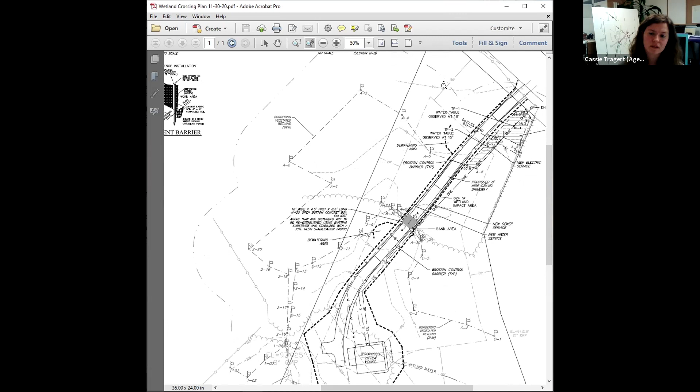In terms of the surveyed as-built drawing, though, that's something that we kind of like to document compliance with the order of conditions, because that was something you wanted to strike also, right? Yes. Yep.

Could we rephrase that? So that would be... I'm not sure which number that is. I can pull it up again. That is way at the end there. It's 60 something, I think.

61C. An as-built plan signed and stamped by a registered professional engineer or land surveyor showing post-construction conditions within all areas under the jurisdiction of the Wetlands Protection Act. This plan shall include, at a minimum: all wetland resource area boundaries with associated buffer zones and regulatory setbacks, areas taken from the final approved plans of record in this order of conditions; two, locations and elevations of all stormwater management conveyance and structures and best management designs. Obviously, that's not applicable in this instance.

Distances from any structures constructed under the order to wetland resource areas. Structures include, but not limited to, all buildings, septic system components, wells, utility lines, fences, retaining walls, and roads/driveways. Four, a line delineating the limit of work. Work includes any filling, excavating, and/or disturbance of soils or vegetation approved under this order. And then five, wetland resource replication, restoration, or enhancement area, including areas of invasive species management included under this order.

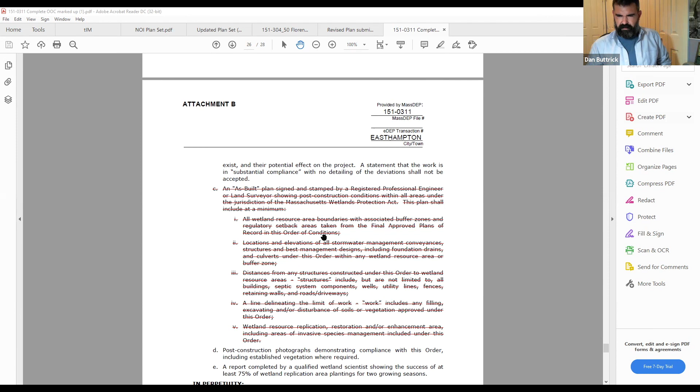I mean, until Melissa's here, and for years on—I forget, one of the developments, Button Road or Treehouse or something—every time development of a property was completed, they would come before us for a certificate of compliance, like a partial certificate of compliance for that property, and provide a plan. I guess I'm not sure right now what level of documentation we asked for at that point, but we could wait, talk to Melissa, and then see what that level of documentation was, so we weren't doing anything more stringent in this case, because I think those worked out fine.

So you're okay with that? Yeah, I'm okay with talking to Melissa about it, and I can do a little research myself.

So you're saying that there's possibly precedent from the Treehouse project where there were multiple potential as-builts needed, and there was maybe some leniency or rewording that was a little less burdensome, sounds like? Yeah, that could be. Not sure which project it was, but it was down in your neck of the woods, Michael, I think. Yeah, check Treehouse, I think that's accurate. Yeah.

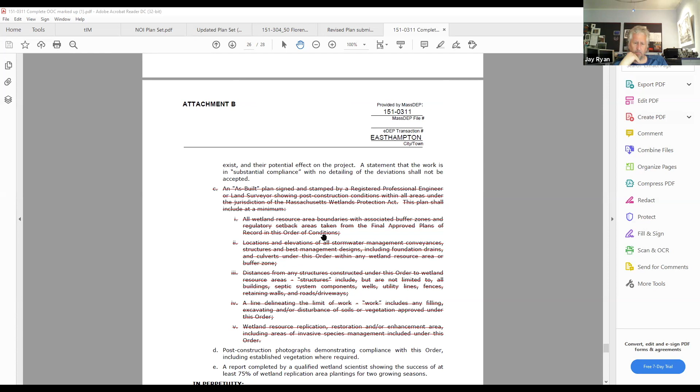I think we're talking about not getting rid of 16E. Yep, I have that noted. But otherwise, the rest of them seem reasonable.

Yeah, I don't know how the commission wants to do this administratively. You could go through and explicitly say, okay, on the list, those typos have already been noted. But say 16D, they're okay with striking that. 16C, okay with striking. I don't know if you want to do it that way, or if you feel like you've reviewed all these changes sufficiently enough to just say all of them are good to go except for those noted. I haven't really reviewed it, so I don't want to say that yet.

So what was the reason we didn't want to include invasives? Talking about 16C, that's just the inventory of the invasives. It would be nice, but that isn't something we discussed going through. That requires somebody going through and actually finding and identifying them all. This is a farm—there's going to be multiflora floating around, and other things here, there, and everywhere. In the areas of work, obviously he's going to take stuff like that out where he can.

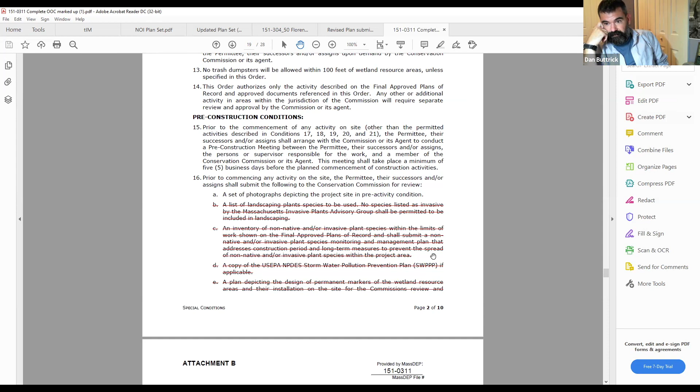But it sounds like we're going to be looking at this a bit more next week. It's true—if we need clarification on the language, at least for item 16, or the as-built requirement, it sounds like this is going to get continued anyway. We can obviously keep discussing all these other items.

Yeah, the main thing is for him to be in compliance, he needs to be able to comfortably record this. In terms of the invasives, my experience is oftentimes we will offer removal of invasives as part of a remediation or something like that. This site doesn't have a huge amount to start with in this area, but I'm sure there's some here and there. That wasn't something we talked about though.

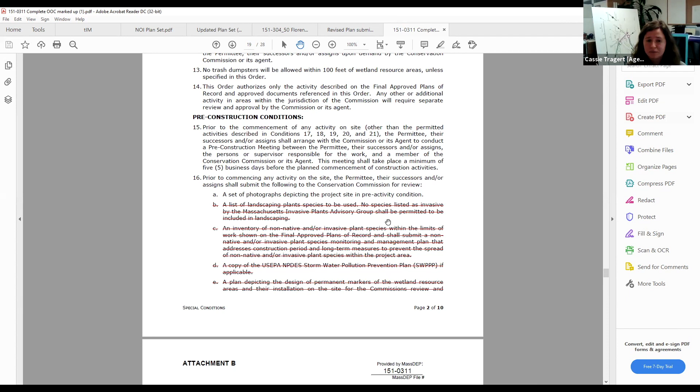Yeah, if you folks need to think about it and get Melissa's input, that's fine, and we can go from there. I think I would like to do that. Definitely, one of the biggest ones is the as-built—that's the one with the most questions. So I have to do a little more research anyway before the next meeting; I obviously can't do it right now. So, it's up to you guys, but if you're okay with that, Terry, maybe that makes the most sense.

Yeah, the question is do you want single family homes to be doing as-builts, or is that something that should be more for commercial, larger developments? That's your call.

Yep, well, let's see what we did for other single family houses. All right, so I guess we'll just wait and can finalize the discussion next meeting. Sure, that'd be June 28th.

Yep, and we don't need to make a motion or anything. This is just part of the compliance updates right now, so we don't have to make a motion to continue or anything like that.

But I just want to say, Terry, I appreciate your patience in this process, and Mr. Chickwins, I get how this is confusing and it's a lot, and there's parts in here that we didn't discuss at the hearing. For somebody like him to get 60 some odd conditions, when we talked about 4 in the meeting, was pretty overwhelming. Understandably, it's a lot.

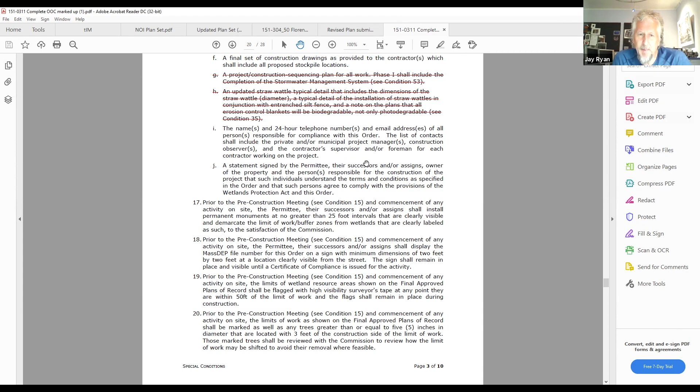What else? Let's see, we've been having 3 hours of fun so far, so. I'm still having fun.

Okay, we have a bunch of, I don't have any other updates for any other items. Those are the only ones, ongoing projects and open space and everything like that. We have a lot of minutes to approve, and I believe we probably don't have the right people for most of them.

Very possible. Potentially April 4th, because we were just waiting for Michael, I thought, for that one. 24th? Excuse me, April 24th. But maybe we don't have enough people. You're waiting for me? Yeah, because that was the meeting that similarly didn't have Julie or Melissa there. So we needed all the people.

We just had quorum, so we needed everyone who was there. But I mean, if you guys want, we can just wait. Let's skip it, yeah, let's just skip it for now. Okay, cool. One that we really can't... I think we can approve that one, right? I mean, in the interest of time, maybe it's easiest just to wait either way. Just skip it for now, as long as you can definitely be at the next meeting, Mike.

All right, okay, so the next item, this one I'd rather not skip: 99 Hendrick Street boundary resolution review. This does have a request for a vote. Essentially, if you're familiar with 99 Hendrick Street, we all recently issued a certificate of compliance for a bridge/crossing that was associated with Mr. Daniel Daigle. That was issued, that's fine.

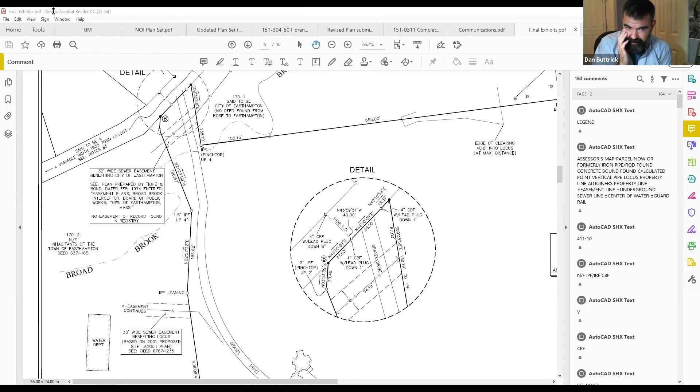I just don't understand what our role is. Yeah, I don't know. He said that we were just asking that the acceptance of the survey that Daigle had done as correct and clear at the boundary. That's what this is all trying to do.

As the land is shown as belonging to the Conservation Commission, I would need their authority to allow the mayor to enter into the boundary line agreement. It would, and then the vote language that I showed you. So some part of it is owned by the commission, probably somewhere in the... somewhere. I don't know. I mean, I don't have any reason to believe that he's incorrect.

So, wait, which property? 170, this big one. What? I honestly, I don't know. We can, I can call the attorney. He gave me his number, and I can get him in here if you want. And we can do it that way.

Which property is it? 99 Hendrick Street. On the map, where is it? Here? It's this little leg. This is the area in question. Okay. Maybe it's because there's this chunk that's involved in this property.

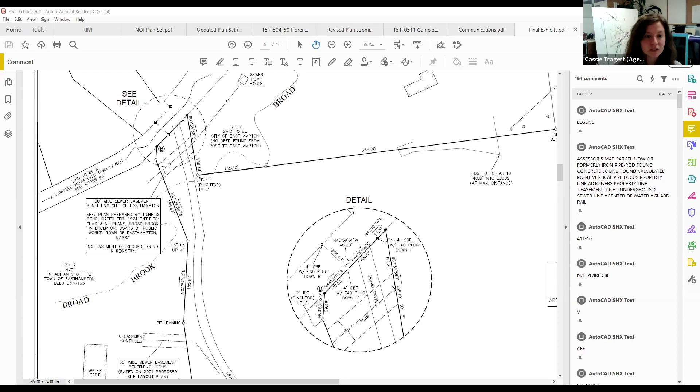Is there urgent need, or can we postpone it? It's hard to say. It kind of seemed like they were trying to move along with this. I mean, I don't think it's the end of the world if it gets continued, but it did seem like they were trying to move along. So we have two other general business items, and you can see if he responds in time. So we can kind of pause this, and I'll see if he can jump on before we finish these two other items. Okay.

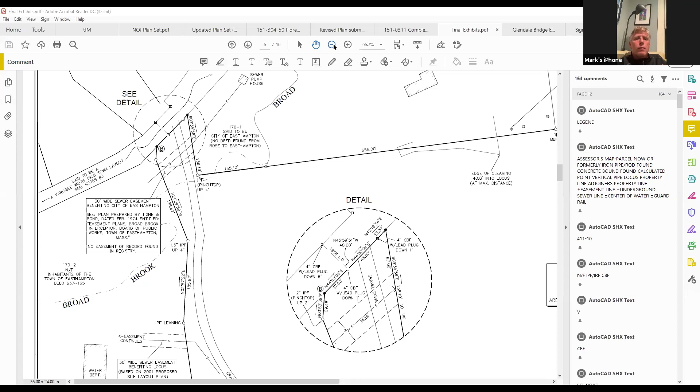But ultimately, it would be the city council who would make the conveyance in any event. I'm looking at this on my phone, so I apologize, I can't see very well, but as we've been talking in the last couple items, I've been looking through the information.

So we're not actually voting to grant the easement. We're voting to confirm the boundary line opinion. So what you're voting to do is authorize the mayor to enter into a boundary line agreement, which confirms the existing boundaries. Okay, that makes a lot more sense.

So I can pull up again that vote language. Does anybody have any other questions now since he's here? That makes a lot of sense. Yes.

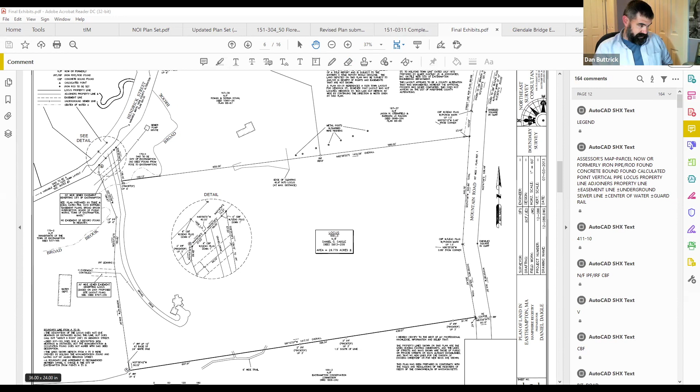And then just so you guys are aware, what will happen is, assuming that you approve it, it would then go to the city council, and they would then go through basically the same process you're going through to authorize the mayor to actually enter into the agreement. Okay.

So would you like, we hardly ever do these formal things, should we read the resolution in the minutes as part of our motion, or? Yeah, that would be the preferable way to do it.

All right, I've actually never done this before, so I guess I would like to make a motion, a resolution to enter into a boundary line agreement with Daniel Daigle, whereas the city of Easthampton owns certain real property identified on page 2 of 6 of the Daigle exhibits attached and provided to the commission and incorporated herein, known as city property, I think.

And whereas Daniel Daigle, the owner of certain real property identified at page 2 of 6 of the Daigle exhibits attached here and incorporated herein, the Daigle property, wishes to establish the boundaries of the Daigle property and the city property by entering into a boundary line agreement.

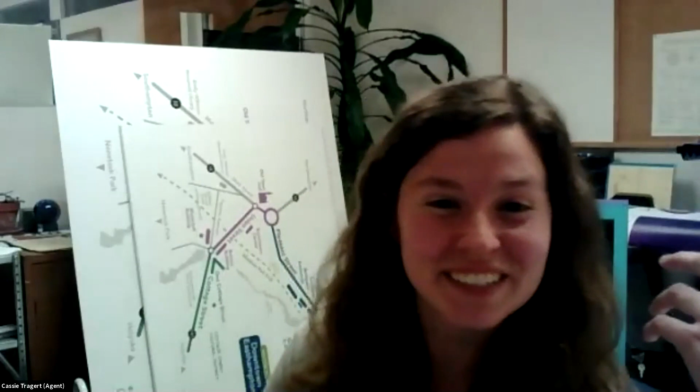Y'all probably didn't hear me read that resolution either. You just didn't. Oh, we did, I heard it, that one worked. I wasn't sure if I was supposed to read that part or if it's at the bottom where it says Conservation Commission vote, which I didn't read. Well, this is brand new for me, so that's what I thought, you just had to do the bottom part. But once he was here, it seemed like he said he wanted you to read the whole resolution. So better safe than sorry, I guess.

All good, so what's our next meeting? A live meeting or? I don't know. Okay, don't know, I don't know. Hopefully Charlie Baker could put it through tomorrow, and then he was just late by a day or something. But then if they don't, the city wants to probably do hybrid, but we haven't worked out the details of that yet. I don't remember that other conversation we had at a previous meeting. It's a lot of technological questions of how to accommodate that. But I think it would be prudent for you all to prepare yourself psychologically for coming back in.

Not a problem, okay, I'll keep you posted. As soon as I know stuff, I'll let you know.

I haven't left the house in a couple of years, so it might be nice to actually leave. Yep, it's a good silver lining aspect. We'll be less comfortable, so maybe meetings won't go as long. I might have to get my hair cut. Which one?

If anyone thinks of questions about it, just feel free to email me. Okay, no problem, I just figured there'd be someone will have a meeting before us, I know. Yeah, we kind of timed it perfectly. We gave ourselves the absolute longest chunk that we could have in between meetings, so by having ours tonight.